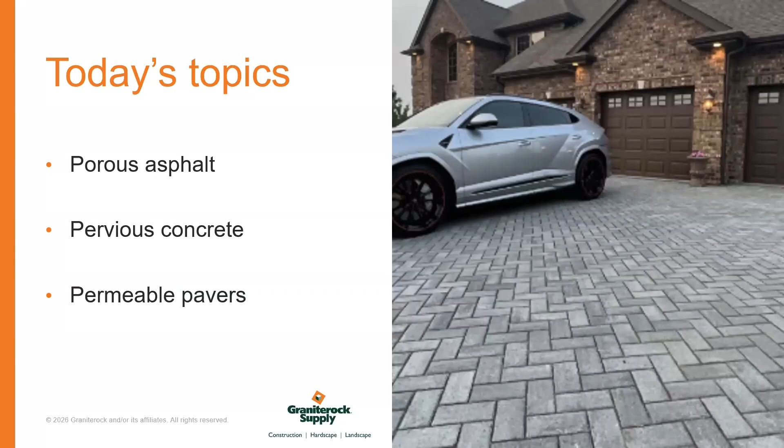We're going to start with asphalt today. I'll talk about the good, the bad, and everything in between. Asphalt is kind of limited in our ability to provide here in this area, but there's a common theme with all 3 applications. It's all about the base, and I can't stress how important that is, and what that means to these projects performing the way they're intended to. Without the correct materials being laid out ahead of time, or the proper dig out, proper placement of base, and the proper materials, none of these systems will perform as they're supposed to.

What we're looking for is that ASTM number 57, also known as the 3/4 drain rock. This allows for all these applications to do what they're intended to.

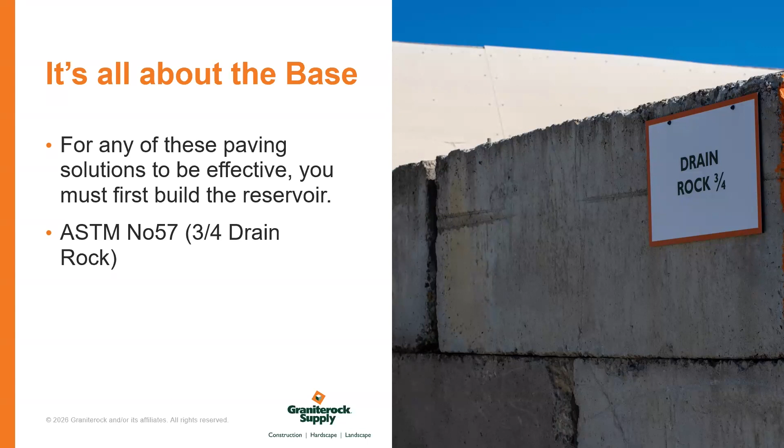Porous asphalt, quick definition there, is a pavement that consists of a porous asphalt surface with an underlying aggregate reservoir, your base, that temporarily stores rainwater runoff before it passes through the natural subsoil. This system replaces traditional non-permeable pavement, allowing for built-in stormwater management systems. Very common in LID projects, which are low impact development.

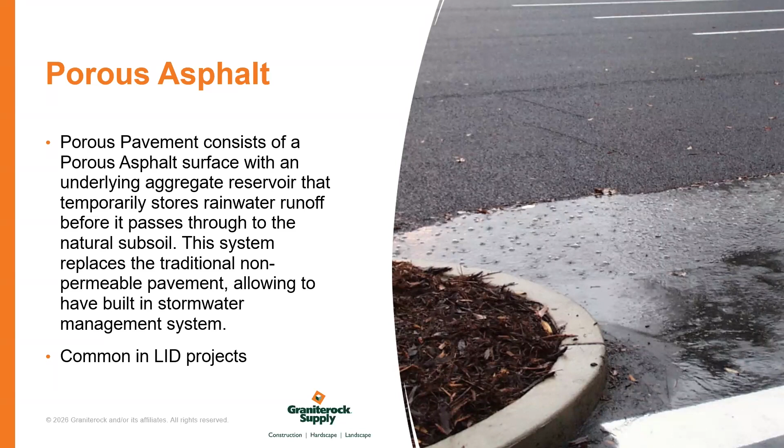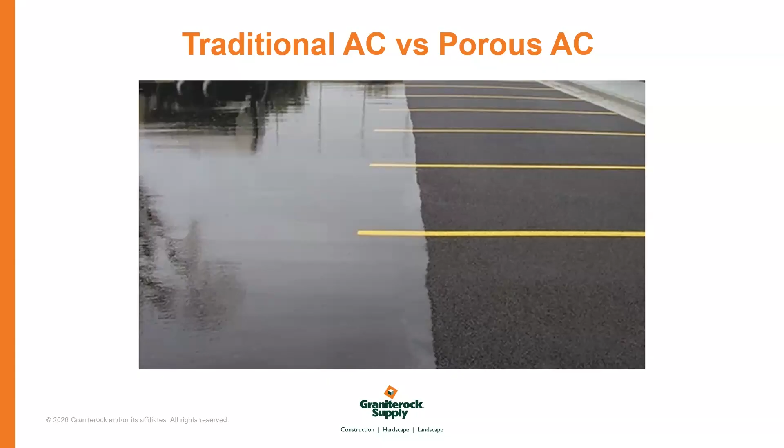Depending on how much traffic and the weight of the traffic, you're going to go from 2.5 inches minimum to 6 inches, and you can continue going up just based on the rating that you're trying to accomplish.

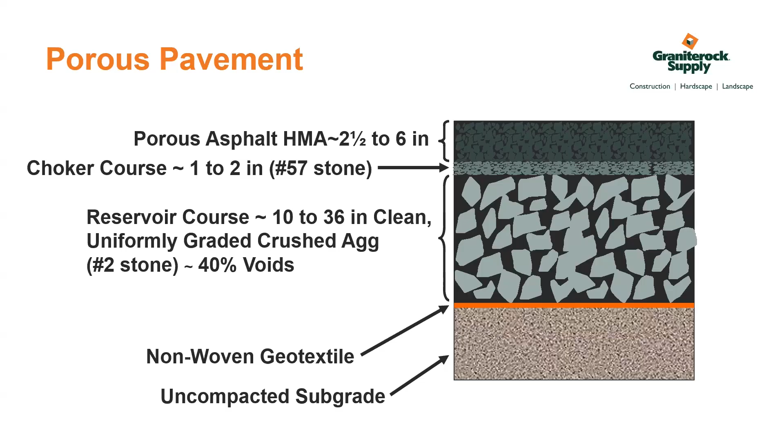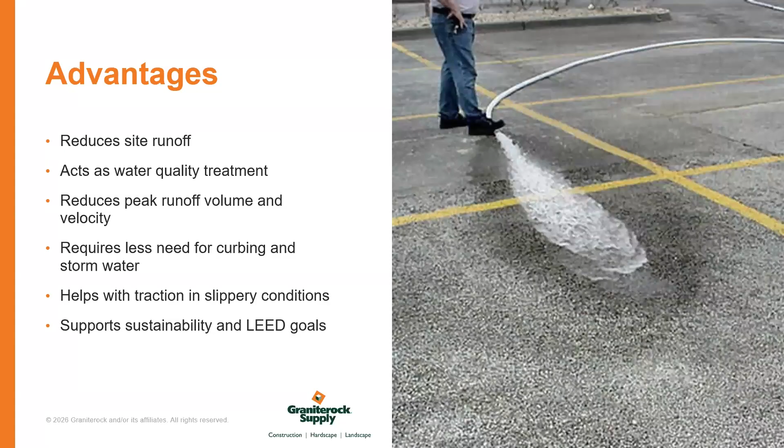Some of the advantages include reducing site runoff, so your water finds its way into the ground. It acts as a water quality treatment, serving as a filter for the water. It reduces peak runoff volume and velocity, requires less need for curbing and stormwater, helps with traction in slippery conditions, and supports sustainable LEED goals, which is a big thing around here.

Some of the limitations: it's not very suitable for high traffic, and it reduces effectiveness if clogged. Maintenance is going to come up three different times here. A lot of the limitations are very similar across these applications, but it requires special equipment. You can't go in with a regular sweeper, you need a high-powered vacuum.

Material availability - the reason I'm going through this one a little faster than I should is because the nearest plant able to provide that product is in Redwood City, one of our facilities. By the time it comes down here, the workability just isn't there. You only have so much time to actually work with the material. So being that it would come out of Redwood City, it's very limited in our ability to perform that project.

The installers - it requires a special type of installer. They have to be certified, and there aren't a lot of them in the area. Even up north, there's just a few.

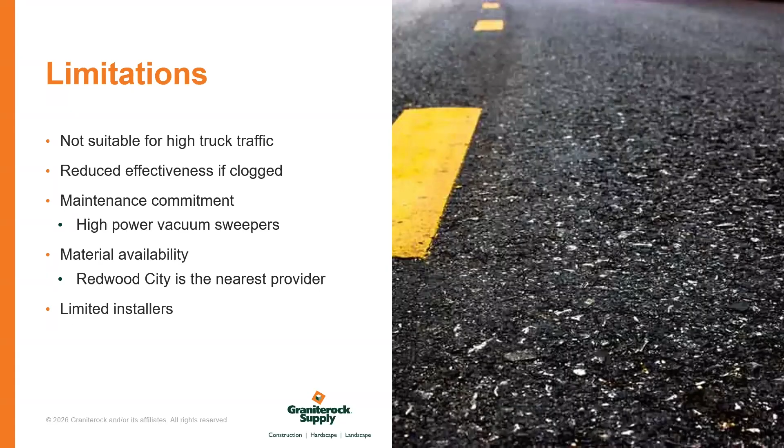That brings us over into pervious concrete. Very similar - a lot of the things I'll talk about kind of go lateral with each other. Pervious concrete is a cement-based concrete product that has a porous structure that allows rainwater to pass directly through the pavement and into the soil naturally.

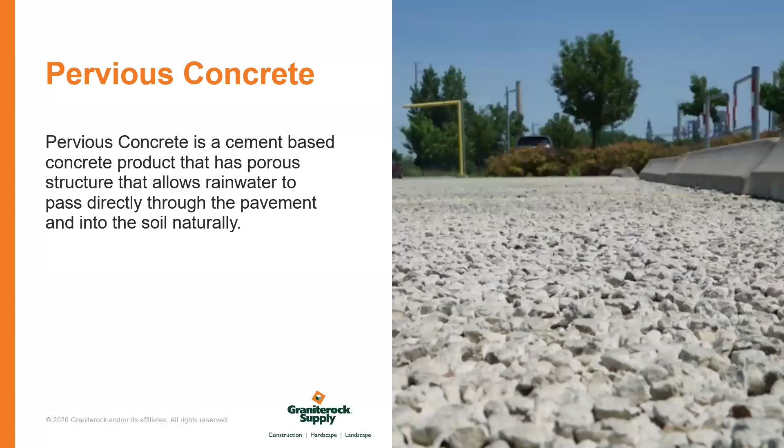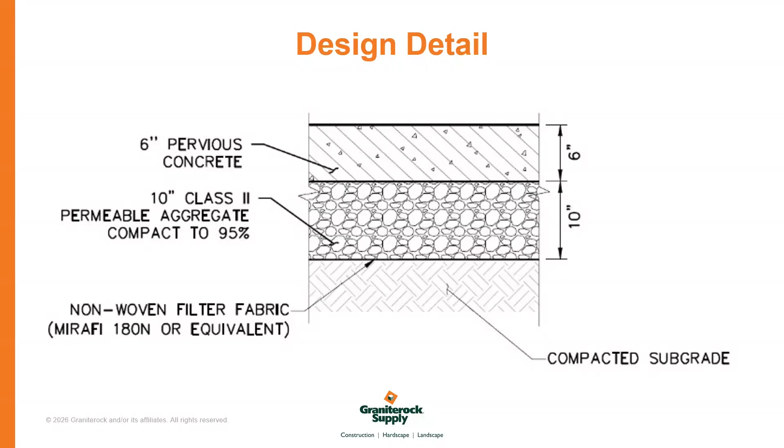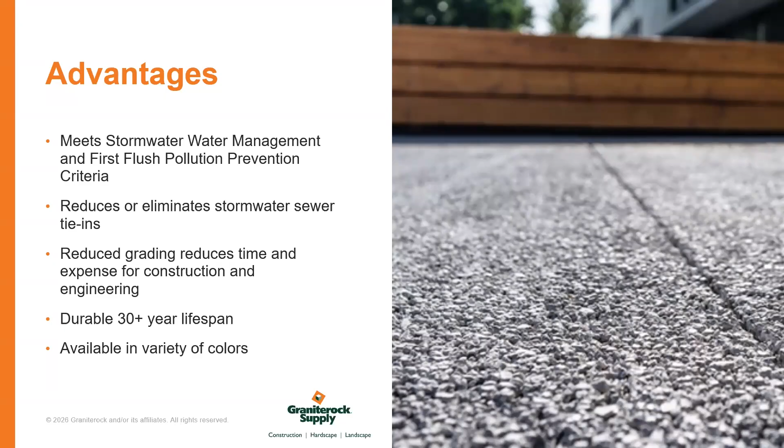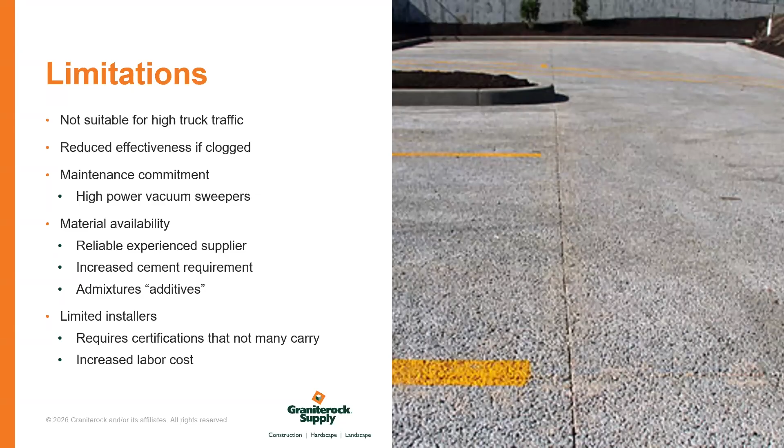It also has very little workable time - you have 90 minutes from the time it gets into the truck to the job site to lay it out. So you're doing sections at a time. If you've got a big project with a lot of square feet, you're going to have to cut out maybe a 10 by 10 or 10 by 20 square, and work days at a time. So it adds cost and adds time to open your project back up.

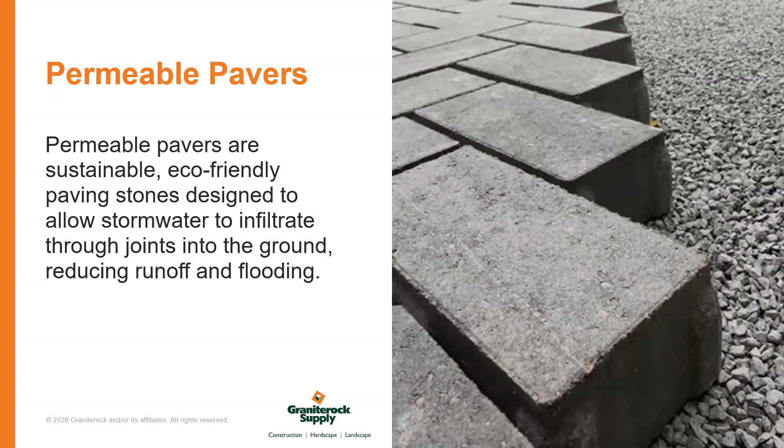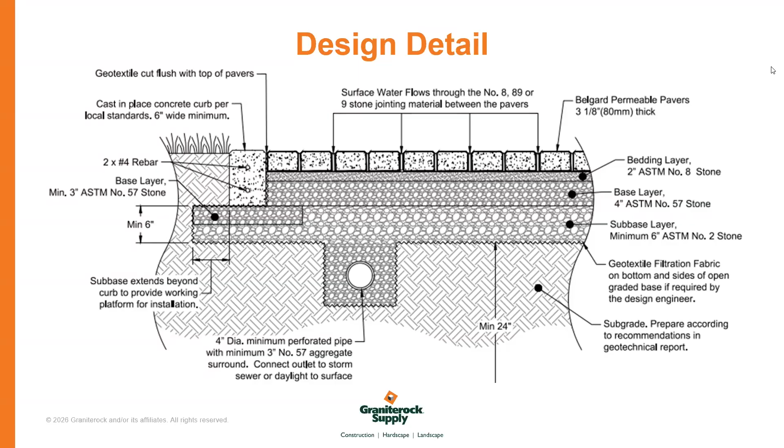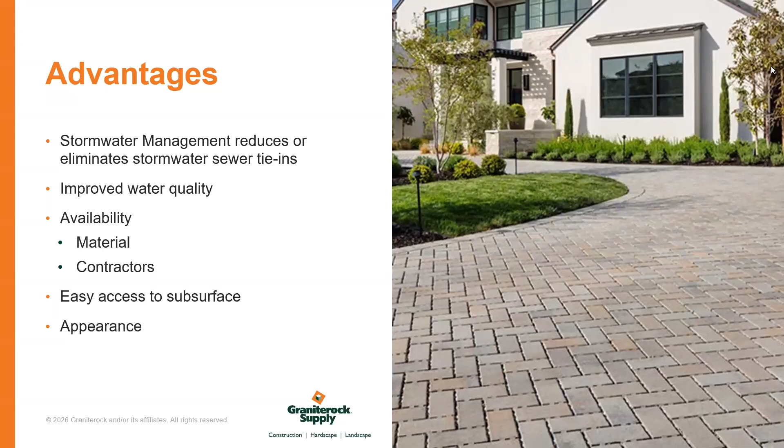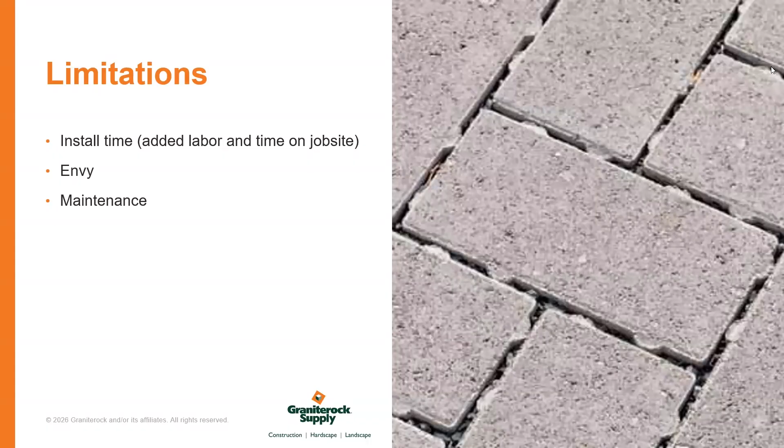Our comprehensive strength and flow rating: pavers are very strong. Since they're smaller, they don't bear a lot of weight in each unit, so it goes up to about 8,000 PSI. Very strong. The infiltration rate is about 300 to 1,000 inches per hour. Pervious concrete's comprehensive strength, depending on how much you put down, goes from 500 to 4,000. So it can get very strong also, and that flows at about 480 inches per hour.

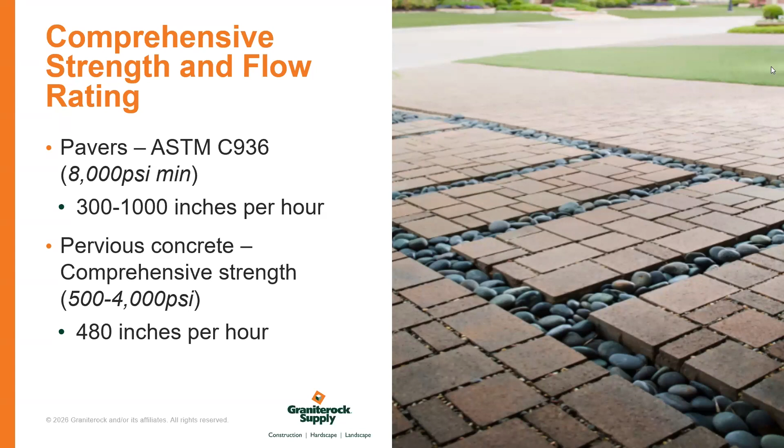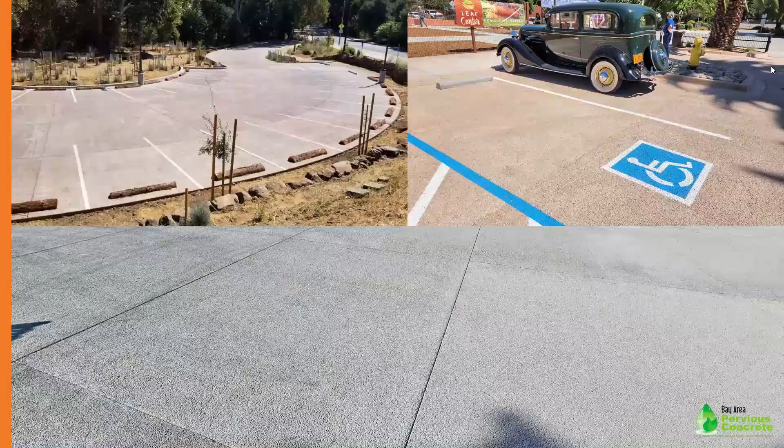I did add some pictures here because I think I may have tried to sell the pavers a little too hard, but I wanted to give some credit where credit's due. These pictures come from David Ligori, he's the president of Bay Area Pervious Concrete. He's one of the few that is set up to do this kind of work in our area. These are pictures of some of the work that he's put out - very nice. Kind of shows what it looks like when it's done and done right.

I did a quick cost analysis, and I separated the material, and then I gave an all-in price, and I checked this with a few contractors in the area. Pervious concrete is going to run you about 220 to 230 a yard, just your material. If you were to get a bid from a contractor, they would tell you all in, you're about $45 to $50 a square foot. For the pavers, the paver itself is about $5.50 to $6.50 a square foot, and all in on the job, it's about 35 to 40 to perform that work. It's going to vary based on the area.

I think one of the things to really keep in mind is that you have to dig down further to build this type of work. You're not cutting out 4 inches, you're not cutting out 8, you're cutting out 10 to 14 inches. And getting rid of dirt in this area has become very, very difficult, so that's just something to keep in mind. If you run into something that is potentially contaminated from whatever reason, it's very hard to get rid of that soil. So these costs will vary based on where you can take the soil, if you can take the soil out, and how much testing is required to start your project there. This just kind of gives you an idea of where you land on this.

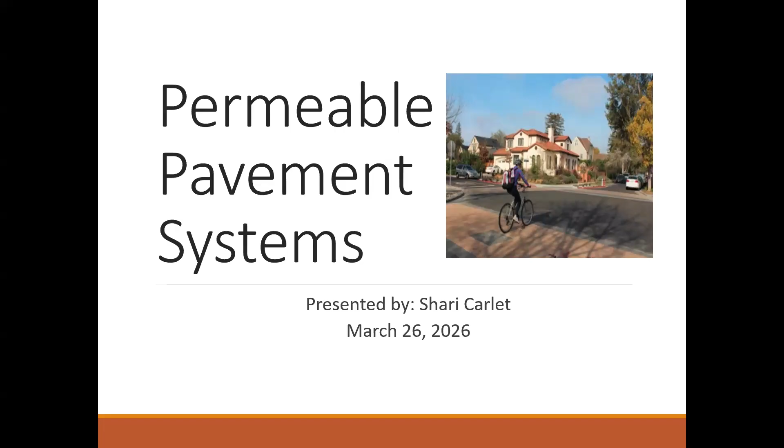Hi everyone, my name is Shari Carlet. I work for the city of Carmel. Today I'll be presenting a little bit more of the example projects for the permeable pavement system. I'm going to be focusing on permeable pavers because that's mostly my experience, and those are projects I worked on, and also other projects that I kind of touched on.

So on the first slide, Chago has discussed permeable pavers, pervious concrete, and porous asphalt, but my focus is going to be on permeable pavers, and this particular one is the Hydro-Flo Technology pavers. The material itself is actually a permeable or porous material, so when you put water on it, it will infiltrate through, and then go through the different layers of permeable materials underneath, or the subgrade.

As an example here, this is what we used in one of our projects in East Palo Alto. This is a Hydroflo paver—it is a universal profile with a herringbone pattern that we've used out there, and the color is Santa Barbara Tan. As discussed earlier, the underlying layers are open-graded sub-base layers. Particularly for this project, we did have an underdrain because the soil there does not have a high infiltration rate.

So we had this infiltration column until we reach the more pervious sublayer of the soil, of the existing soil.

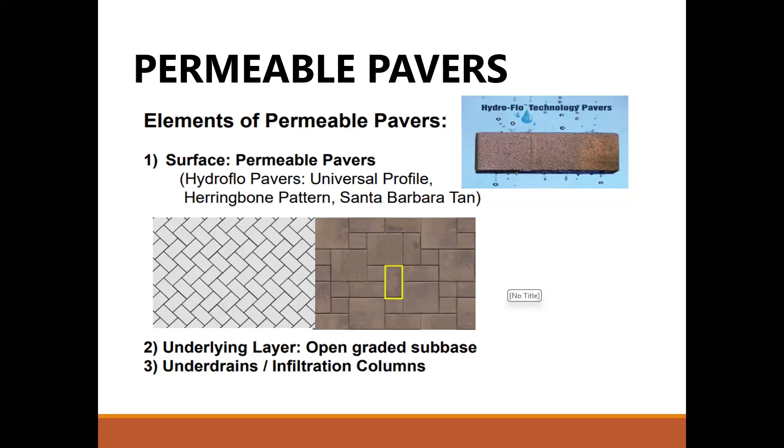Next, I want to present one of the projects I've worked on. It's actually one of the first Green Street pilot projects in the Bay Area, which was part of the MRP permit for the Bay Area. This is the Southgate Neighborhood Green Street project.

This project had issues with local drainage and stormwater quality. We also addressed elements of the bicycle and pedestrian transportation plan to enhance traffic calming and pedestrian safety.

The key elements of the project: the existing conditions were that this neighborhood had narrow streets and on-street parking on both sides. That's one of the hurdles we had to deal with.

A couple of the project elements included about 3,000 square feet of biotreatment areas, and we also used under drains and infiltration columns there.

Another element, which is the primary discussion for this presentation, is permeable pavers. We used them in crosswalks and walkways.

Other designs included planters and biotreatment designs. We also included new storm drain inlets and pipeline installed as overflows, both for the bioretention areas as well as these permeable crosswalks and walkways.

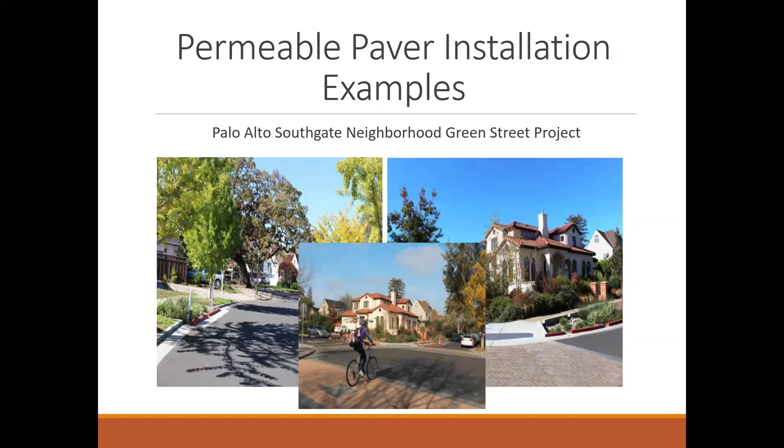As you asked earlier, there are concrete bands here to restrict movement with the permeable pavers. And obviously, the bike lane is right there—it's one of the bike elements designed for this project.

Lessons learned: we encountered a couple of issues while working on these projects. We had to deal with utilities, existing trees, and flatter grade constraints for the biotreatment design.

For both the biotreatment and the permeable paver areas, we had to reduce some aggregate depths because there were storm drain conflicts there.

To address this, since this was the first time green infrastructure was being built in this city, we had to do a lot of community outreach to improve the design.

We also had to address rideability concerns, since you're putting pavers out in the street. There were concerns about the pavers getting uplifted, and also issues with parking, though that's more particular to the bioretention areas.

We also had to coordinate with the city arborists and other city projects. Potholing was important because we needed to do utility relocations.

This project does include sand layers underneath the permeable pavers, which helped with treatment, grading, and protecting groundwater. Again, there were concrete bands to prevent paver movement.

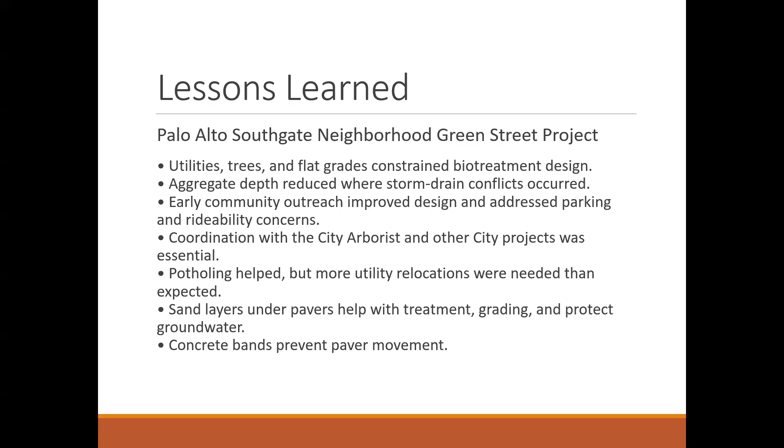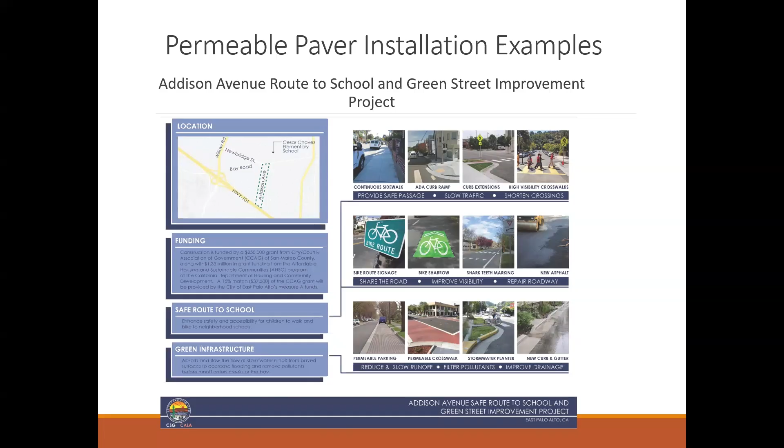Just to highlight the integrated project aspect - this is an integrated project because, again, it was a safe route to school, but it was also a heavily ponded and flooded area. So we used green infrastructure to address stormwater volume as well as stormwater quality, and made that into an improvement for safe route to school. It's a multimodal street improvement that helps with reducing and slowing runoff, filtering pollutants, improving drainage, while incorporating elements like safe route to school and improved bike trails.

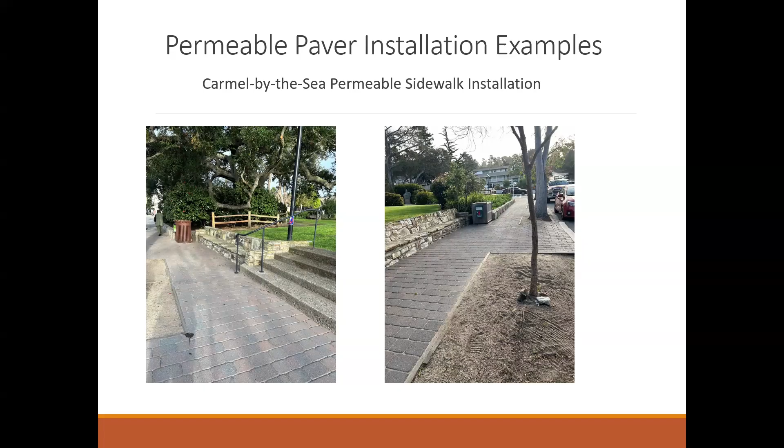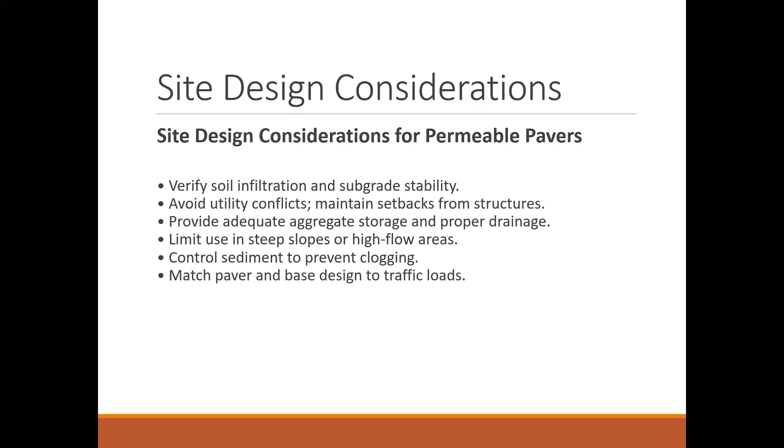So what are the site considerations for permeable pavers? First, we had to hire a geotechnical engineer to confirm soil infiltration and subgrade stability. We also had to avoid utility conflicts and maintain setbacks from permanent structures in the public right of way. We have to make sure we have adequate aggregate storage at the bottom, and if not, we have overflows to address proper drainage. There's obviously a limitation on steep slopes or high flow areas, and there's also sediment control issues we need to deal with to prevent clogging. We also have to match paver and base design to traffic loads. Another consideration is the street configuration - whether you're able to really put that in the street. If it was used for traffic calming, it was used for green infrastructure and drainage, but also for traffic calming in one of our projects in East Palo Alto. So it has multiple uses or benefits.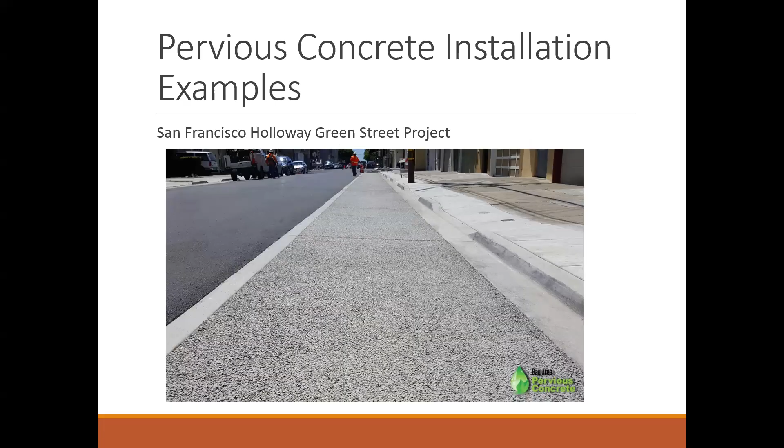Just to give you a way to encourage residents, or even us for the cities - one of the programs I manage in the City of Palo Alto is called the Rainwater Harvesting Program. It gives incentives to residents, business owners, and other entities to install these LID, low impact developments. Some of them are rain barrel cisterns, but one of the items we give rebates for is pervious pavement - elements such as pervious concrete, porous asphalt, and permeable pavers, we do give a rebate for.

We used to give a rebate of $1.50 per square foot, with a 100 square foot minimum, and the maximum we used to give was $1,000 per installation. These are voluntarily done, and because they get incentives, more people are encouraged to do this. There was another program that gave more incentive through our county as well, so they get incentives from both the city and the county. This is just one way to incentivize people to utilize green infrastructure, primarily for this discussion, pervious pavement.

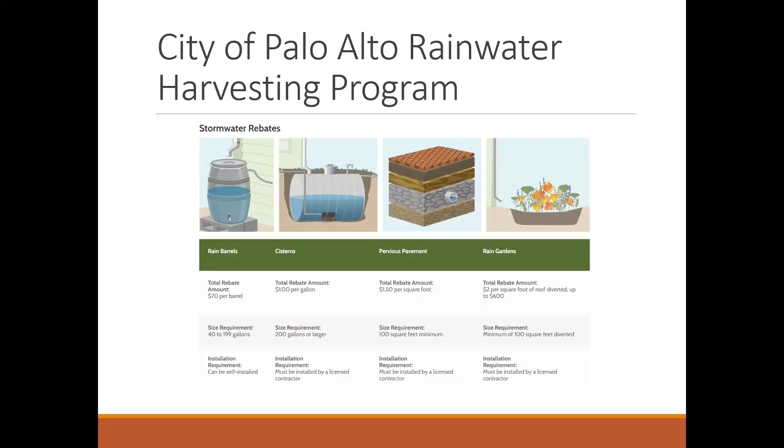And I think that ends my presentation. So thank you all.